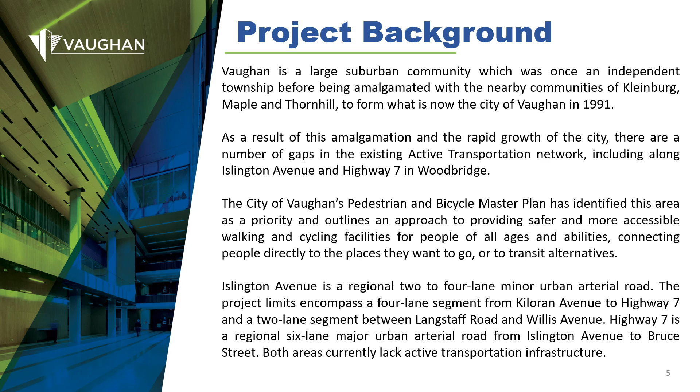Illustrated on the key map is an overview of the project limits within Vaughan. The limits on Islington Avenue are from Kiloran Avenue to Highway 7, which is approximately 2.1 kilometers. Proposed improvements for this section include the addition of a multi-use path on the west side of the roadway.

From Islington Avenue, the project limits continue east along Highway 7 for approximately 385 meters to Bruce Street, for which improvements include the addition of a cycle track on the south side of the roadway.

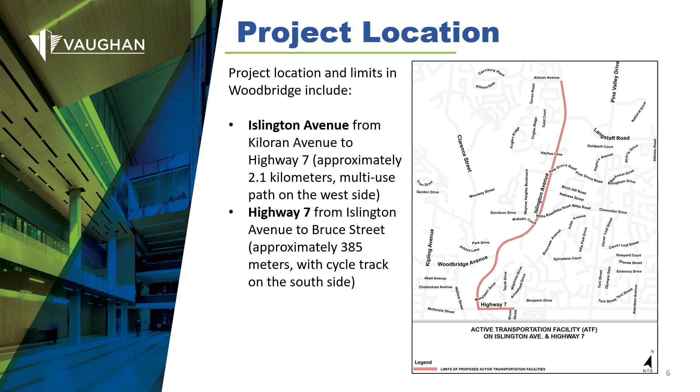The purpose of this project is to connect missing links within the existing cycling network on Islington Avenue and Highway 7. This will involve the design of retrofit options, which minimize impacts to the existing infrastructure while ensuring the proposed facilities provide the most efficient and safest solution considering site constraints.

Improvements will enhance the safety of vulnerable road users, including pedestrians and cyclists, by implementing appropriate facilities that separate active transportation users and vehicular traffic.

The preferred design option will reduce or mitigate impacts to private property and aims to limit impacts to existing mature trees along the corridor. Considering the goals of the project and aforementioned constraints, an in-boulevard multi-use path, which is a two-way separated path shared by pedestrians and cyclists, replacing existing sidewalk, is the preferred option within the project limits on Islington Avenue, while a raised in-boulevard cycle track between curbs and sidewalks are the preferred option on Highway 7.

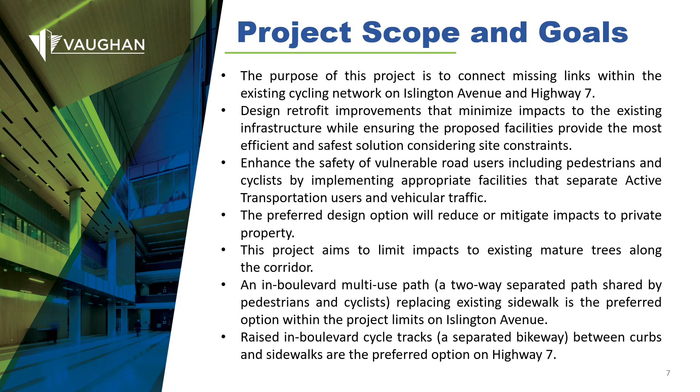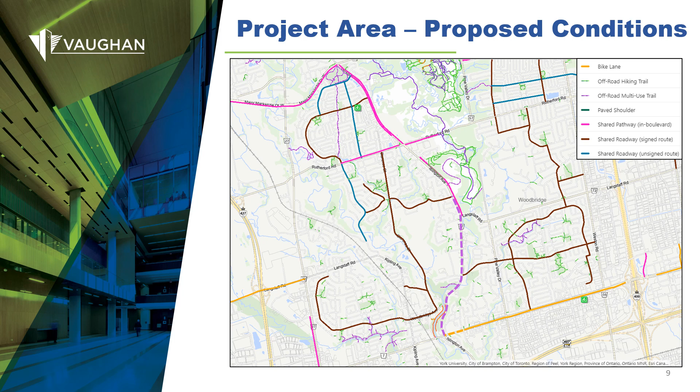Following implementation of the proposed retrofit facilities, missing links will be addressed, as illustrated by the dashed lines showing continuous active transportation facilities from Highway 7 north to Major Mackenzie Drive, including the existing facilities, signed routes, and shared roadways.

Islington Avenue is a regional 2 to 4 lane minor urban arterial road. Photos show the existing conditions within the project limits, including the 4-lane segment looking south from Kiloran Avenue, the 2-lane segment with a shared 2-way left turn lane looking south from Langstaff Road towards Willis Road, and the intersection of Islington Avenue and Highway 7. Existing conditions vary, with some sections consisting of an existing sidewalk, existing asphalt buffer, or a combination thereof, with no accommodation for cyclists.

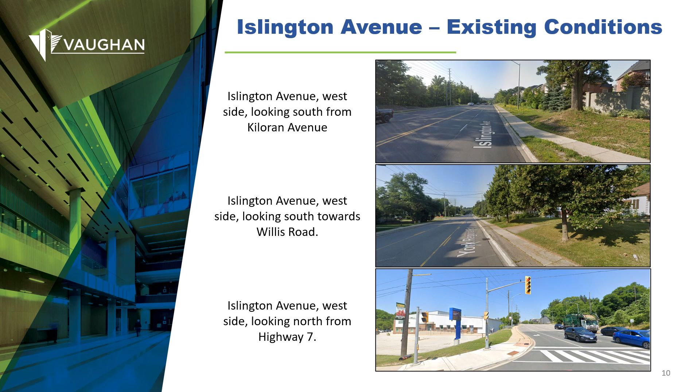Proposed improvements within the corridor consist of replacing the existing sidewalk with a 2-way multi-use path, suitable for use by both pedestrians and cyclists.

Continuing onto Highway 7, which is a regional 6-lane major urban arterial road. Photos show the existing conditions at the intersection with Islington Avenue, looking west, and further east towards Bruce Street. Existing conditions on the south side consist of a concrete sidewalk and wide grass boulevard, and an asphalt splash strip adjacent to the traveled lane, with no accommodation for cyclists.

Proposed improvements within the corridor consist of the addition of a 1-way cycle track adjacent to the curb. Pedestrians will continue to use the existing concrete sidewalk.

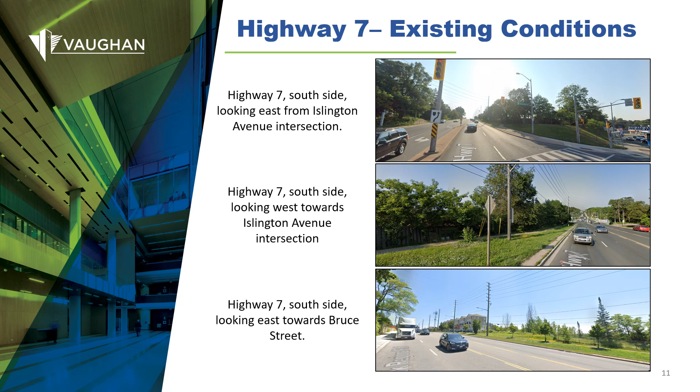To elaborate on the proposed improvements along Islington Avenue, the intent is to provide a 2.4 to 3 meter wide multi-use path in place of the existing sidewalk on the west side of the roadway. A multi-use path is defined as a 2-way path that is horizontally and vertically separated from the traveled portion of the roadway by a curb and buffer, shared by cyclists and pedestrians.

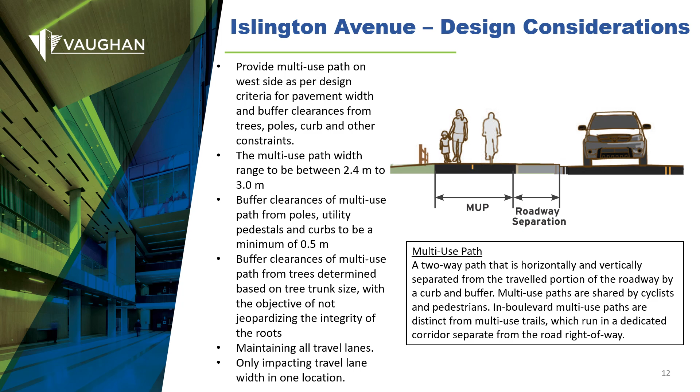Design considerations include maintaining adequate facility width so the path can accommodate 2-way pedestrian and cyclist traffic, with applicable buffer clearances from trees, poles, curb, and other constraints present along the corridor. All vehicular lanes on Islington Avenue will be maintained, with minor modification to the curb lane width at one location between Davidson Drive and Langstaff Road.

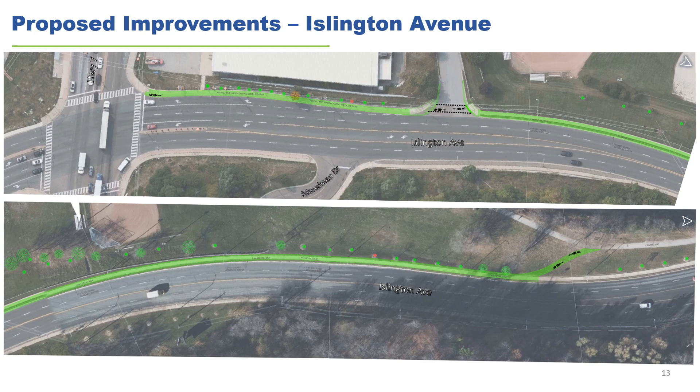The proposed asphalt multi-use path continues, with applicable line painting and signage treatments illustrated at driveways and intersections.

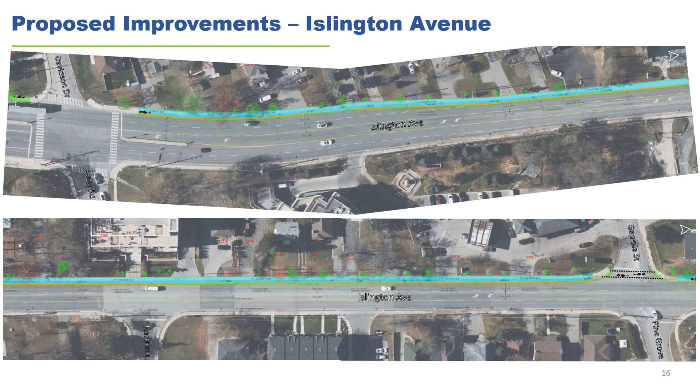North of Davidson Drive, a notable change is the localized lane narrowing shown in orange, which will permit adequate platform width for the proposed multi-use path and buffer behind the curb while minimizing impacts to trees. The localized curb realignment will narrow the existing curb and center left turn lanes from 3.7 to 3.5 meters wide.

The proposed pathway and localized lane narrowing continues north from Davidson Drive and transitions back to existing conditions just south of Langstaff Road.

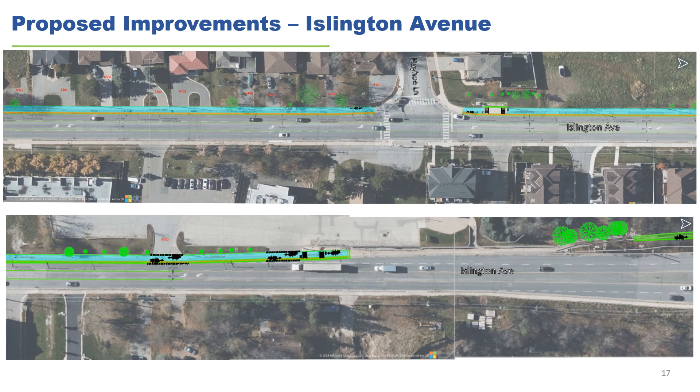North of Langstaff Road, the proposed path makes use of the existing wide boulevard and follows the alignment of the existing sidewalk to Kiloran Avenue, and terminates at the intersection, providing a direct connection to the existing on-road facility on Kiloran Avenue and existing sidewalk network.

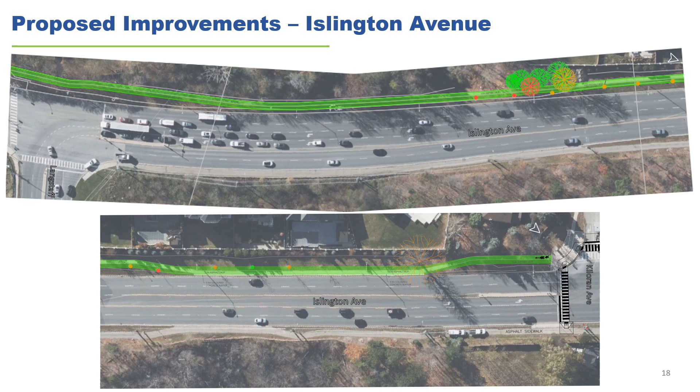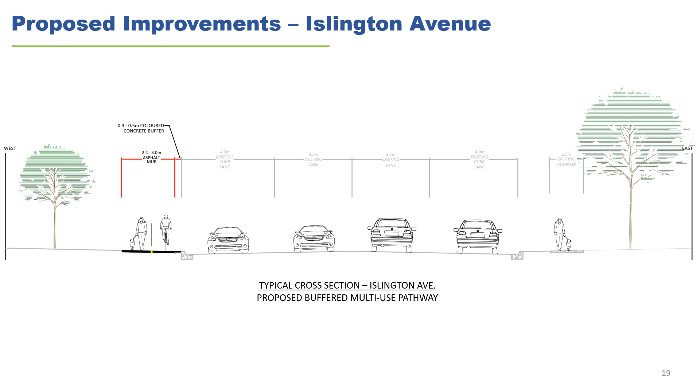This cross-section shows the proposed addition of the buffered multi-use path on the west side of Islington Avenue along the 4-lane segment of the corridor. The proposed path width will vary between 2.4 to 3 meters wide and be located behind the curb and a colored concrete buffer where space permits.

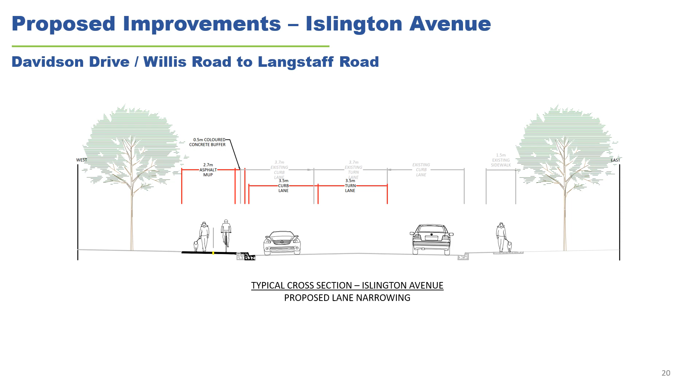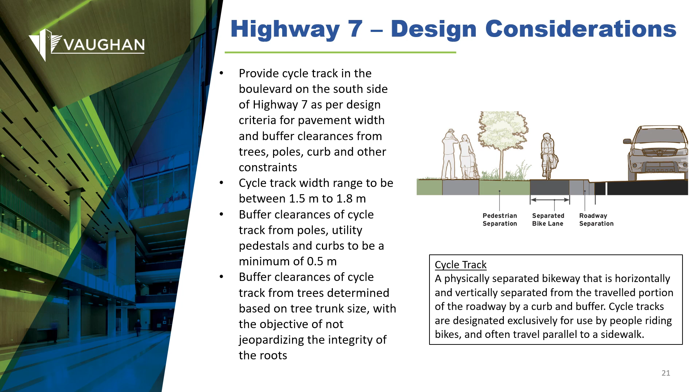The proposed cycle tracks will be parallel to the existing sidewalk and will be designated exclusively for use by cyclists. Design considerations include maintaining adequate buffer clearances from trees, poles, curb, and other constraints present along the corridor.

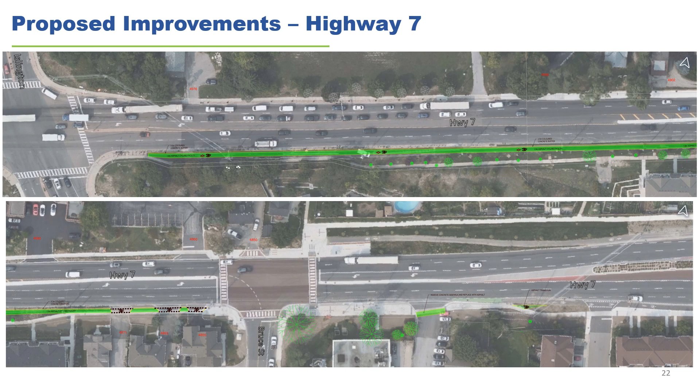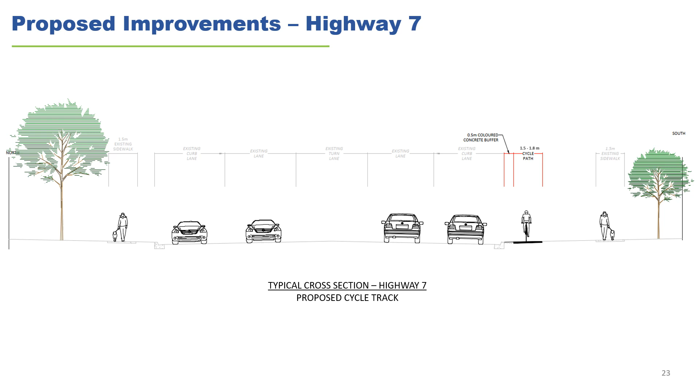This cross-section shows the proposed addition of the cycle track on the south side of Highway 7. As noted, the proposed cycle track width will vary between 1.5 to 1.8 meters wide and be located behind the curb and a colored concrete buffer where space permits. The cycle track will make use of existing space in the boulevard, and the existing sidewalk is to be maintained for pedestrians. There will be no impact to traveled lanes.

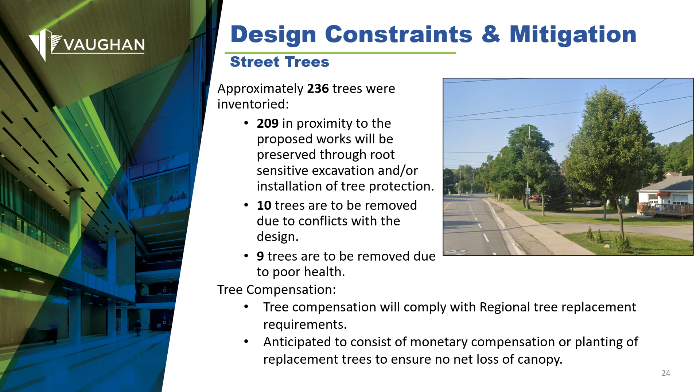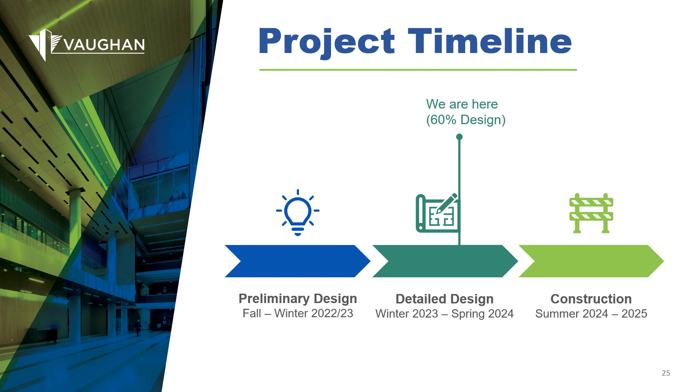If you have any questions, you are encouraged to contact the city's Infrastructure Delivery Department via phone at 905-832-2281, extension 8917, or email at infrastructure.delivery@vaughan.ca. When submitting any questions, please reference project number 2115-01. To meet the anticipated schedule for the project, we ask that any questions are submitted by December 5th, 2023.

This concludes our presentation on proposed active transportation improvements to Islington Avenue and Highway 7. Thank you again for your interest in the project, and we look forward to receiving any questions you wish to share.